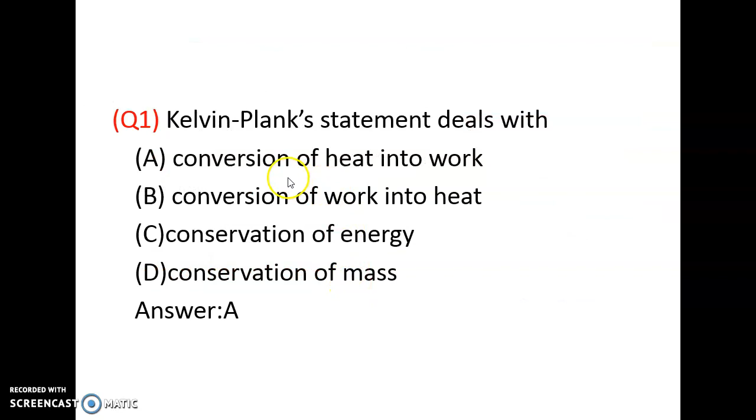The Kelvin Planck statement tells that it is impossible for any heat engine to operate in a thermodynamic cycle and deliver a net amount of energy or work done to its surroundings while receiving heat transfer from a single thermal reservoir. This is called as Kelvin Planck statement. So the Kelvin Planck statement deals with the conversion of heat into work.

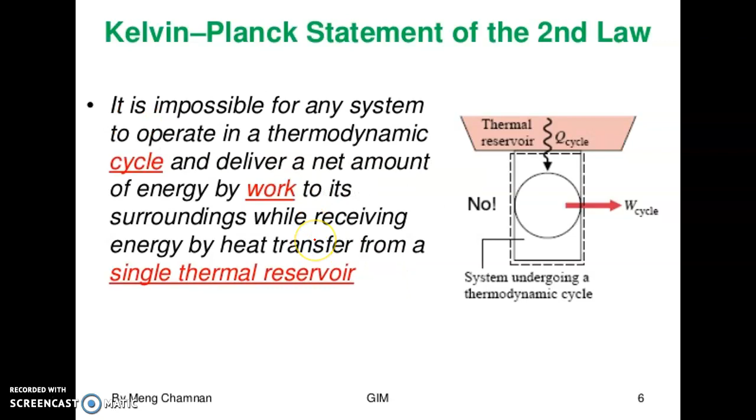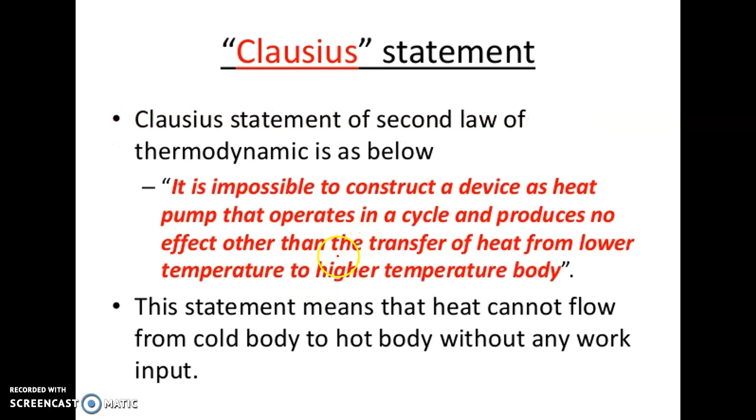The heat always flows from higher temperature to a lower temperature body, but it cannot flow from lower temperature to higher temperature body without the aid of any device. That is a Clausius statement. Heat flows from hot substance to cold substance unaided. So this statement is given by the Clausius. To transfer heat from low temperature body to higher temperature body, we need to give work.

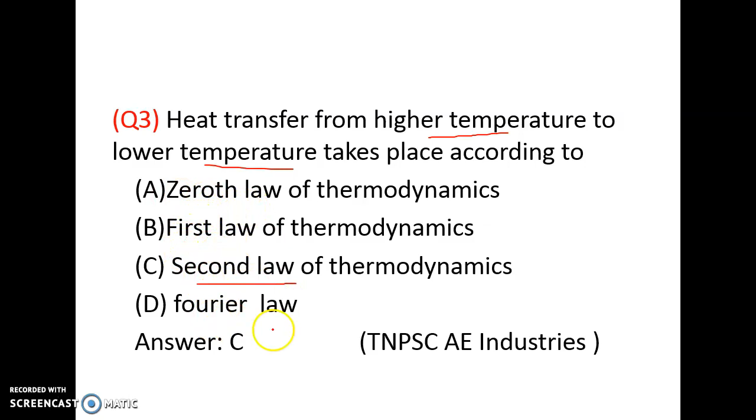Heat transfer from higher temperature to lower temperature takes place according to: zeroth law, first law, second law, Fourier law. It is according to second law of thermodynamics.

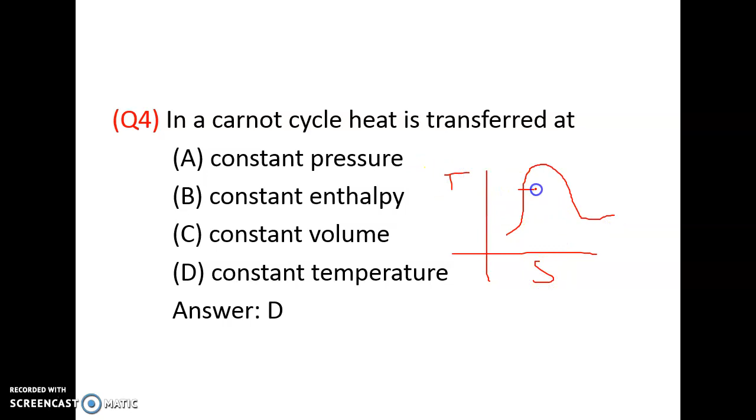In a Carnot cycle, heat is transferred at constant pressure, constant enthalpy, constant volume, constant temperature. This is the TS diagram for a Carnot cycle. It is a heat addition process, T1, T2. Heat is added at the constant temperature. Heat is delivered at the constant temperature.

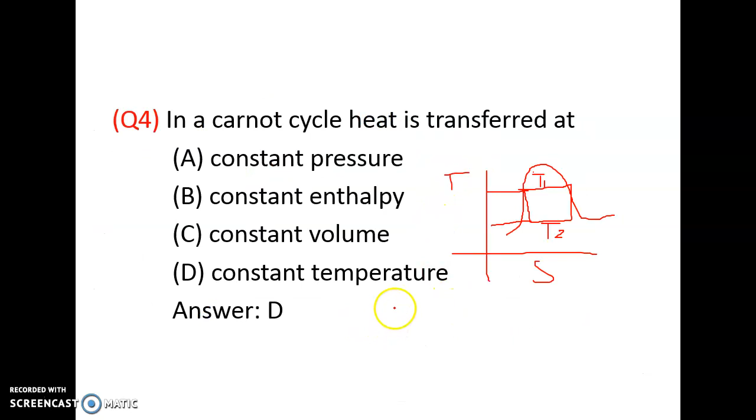So it is a constant temperature process. Heat is transferred at the constant temperature, so option is D. So this is a Carnot cycle. As an example for a Carnot cycle, you can consider a thermal power plant.

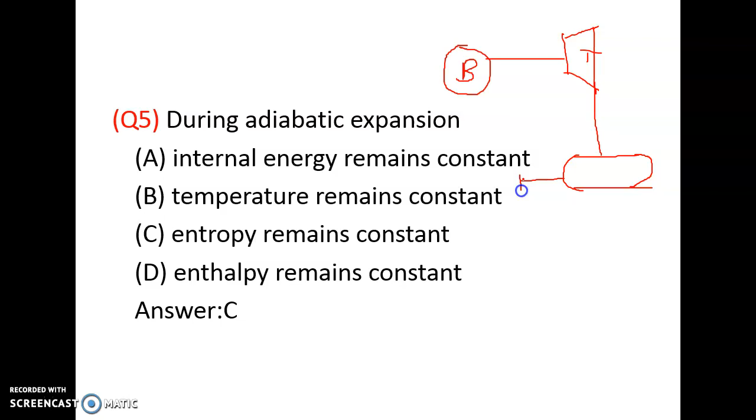In a thermal power plant, there is a boiler, and from the boiler, the steam is transferred to turbine. Then from the turbine, it is transferred to the condenser. In the turbine there is work done, in the condenser heat is transferred out, and there is a pump. Pump work is done. In the boiler, we have to give heat Q1, and in the turbine, we are getting work done, WT, and in the condenser, heat is transferred out.

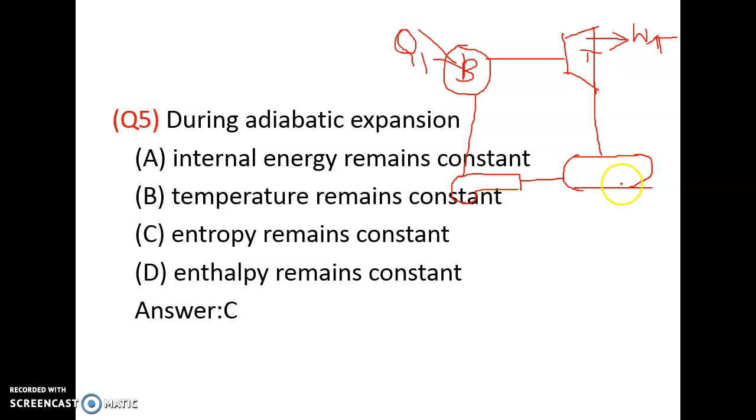Heat is transferred out, Q2, and in the pump we have to give work. So in the boiler we are giving heat, in the turbine we are getting work done, and in the condenser heat is transferred out. Here we are giving work done.

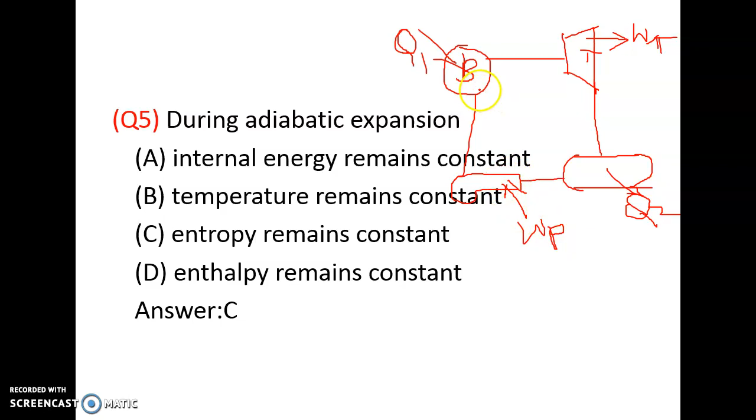So net heat transfer equals Q1 minus Q2, and Q1 minus Q2 equals WT minus WP. This is according to first law of thermodynamics.

Cyclic integral of dQ equal to cyclic integral of dW. So Q1 minus Q2 equal to WT minus WP. Then efficiency of Carnot engine equal to output by input. So output is W net, divided by Q1. Input is Q1, we are giving input Q1, so W net by Q1.

So W net equal to Q1 minus Q2. W net equal to Q net, therefore it is equal to Q1 minus Q2. So Q1 minus Q2 divided by Q1, that is equal to 1 minus Q2 by Q1. So this is the efficiency of the Carnot heat engine.

So Carnot cycle is given here. In the boiler, we are giving heat Q1, and in this turbine we are getting work done WT, and here it is a condenser, the heat is transferred out Q2, and here in the pump we are giving work done WP. The efficiency of Carnot heat engine is equal to Q1 minus Q2 by Q1, that is equal to 1 minus Q2 by Q1. So this is the efficiency of Carnot engine.

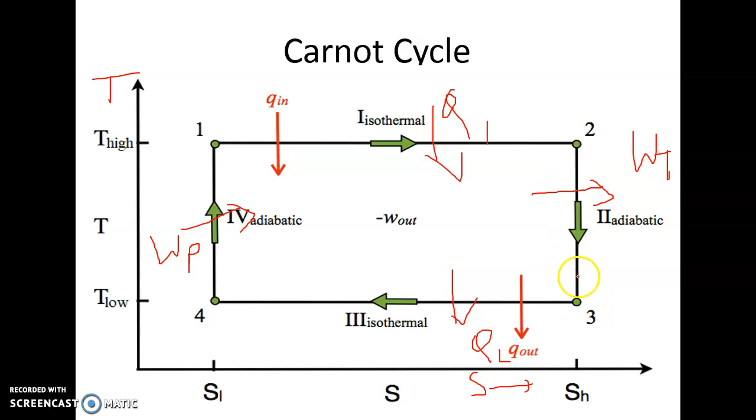During adiabatic expansion, internal energy remains constant, temperature remains constant, entropy remains constant, enthalpy remains constant. So this is a TS diagram, T is temperature and S is entropy. In the turbine we are getting adiabatic expansion. The adiabatic expansion process is an isentropic process, so entropy remains constant. During adiabatic expansion, entropy remains constant.

In Carnot heat engine, when heat is supplied by a source: the temperature of source decreases, the temperature of source remains constant, temperature of sink increases, temperature of source and sink decreases. The option is B. The temperature of source remains constant. By supplying heat Q1, the temperature of source will not change. That is, it is the temperature of the source T1.

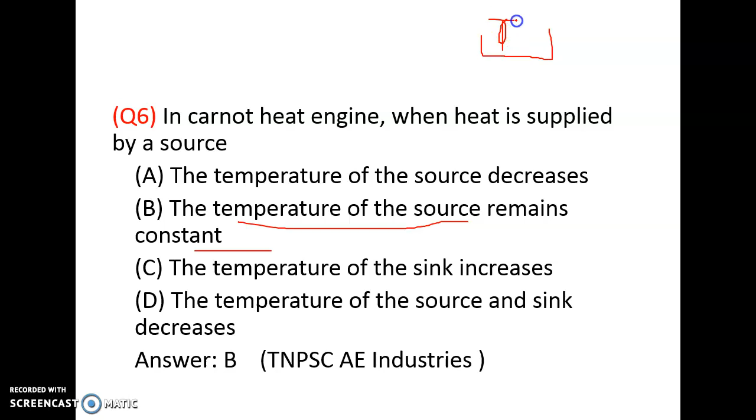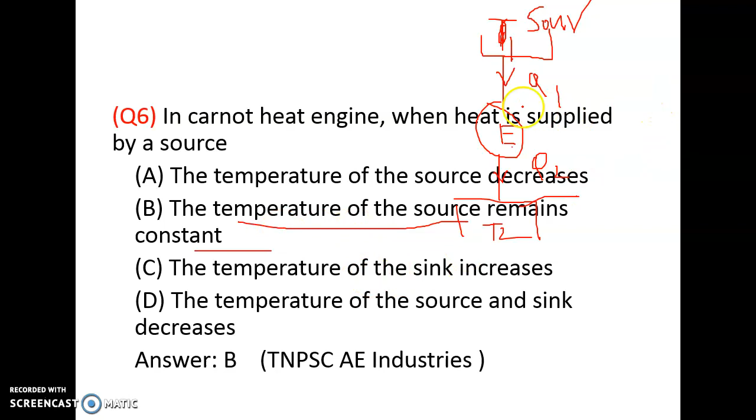So heat engine, this is a sink T2. The higher temperature T1 is called a source. This one is called a sink. This is a heat engine, and the source transfers heat Q1 to the heat engine, and the heat engine delivers heat Q2 to the sink. The temperature of source and sink does not change. The temperature of boiler does not change. So temperature of source remains constant, temperature of sink also remains constant. So option B is correct.

The cyclic heat engine does 50 kJ of work per cycle. The efficiency of the heat engine is 75%. The heat rejected per cycle is? We know that efficiency of heat engine equal to Q1 minus Q2 by Q1, that is 1 minus Q2 by Q1. So W net by Q1 is efficiency, 0.75 equal to W net by Q1. W net equal to 50 kilojoule.

We know that eta equal to W net by Q1. So 0.75 equal to 50 by Q1. Q1 equal to 50 by 0.75, which is equal to 200 by 3. 0.75 equal to 3 by 4, so 50 into 4, 200, 200 by 3.

We know that W net equal to Q1 minus Q2 equal to 50. So this is equal to 66.67 minus Q2 equal to 50. So Q2 equal to 16.67, 16 2 by 3. So option A is correct.

Question: an industrial heat pump operates between source and sink temperatures of 27 degrees Celsius and minus 13 degrees Celsius. The rates of heat addition and heat rejection are 750 watt and 1000 watt respectively. The COP of the heat pump is? The formula of COP of heat pump: this is a higher temperature source T1, this is the heat pump, and at the bottom it is a sink at a temperature T2.

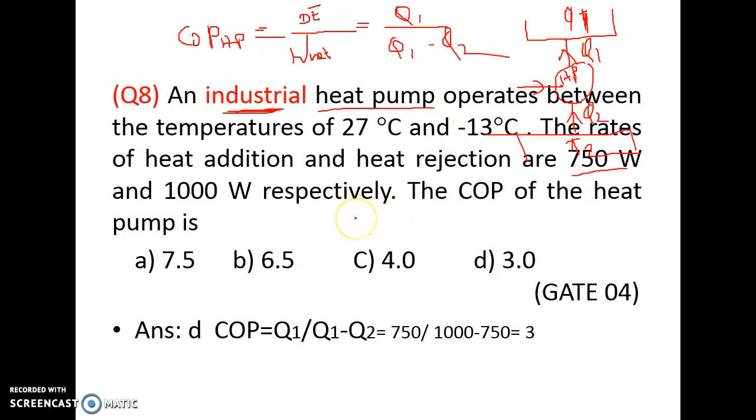Then consider a refrigerator and a heat pump working on reverse Carnot cycle within the same temperature limits. Which of the following is correct? COP of refrigerator equal to COP of heat pump. COP of refrigerator equal to COP of heat pump plus 1. COP of refrigerator equal to COP of heat pump minus 1. COP of refrigerator equal to inverse of COP of heat pump.

In the refrigerator, this is a higher temperature source T1. This is a refrigerator, and this is a sink or evaporator, refrigerating medium. Here in the refrigerator, we have to give external work. According to Clausius statement, we have to give work done to extract heat from the lower temperature to higher temperature. So lower temperature is Q2, higher temperature is Q1. Here the desired effect is Q2.

COP of refrigerator equal to Q2 by Q1 minus Q2. COP of heat pump is Q1 by Q1 minus Q2. But COP of refrigerator is Q2 by Q1 minus Q2. So the COP of refrigerator equal to COP of heat pump minus 1, which operate between the same temperature limits. So option C is correct.

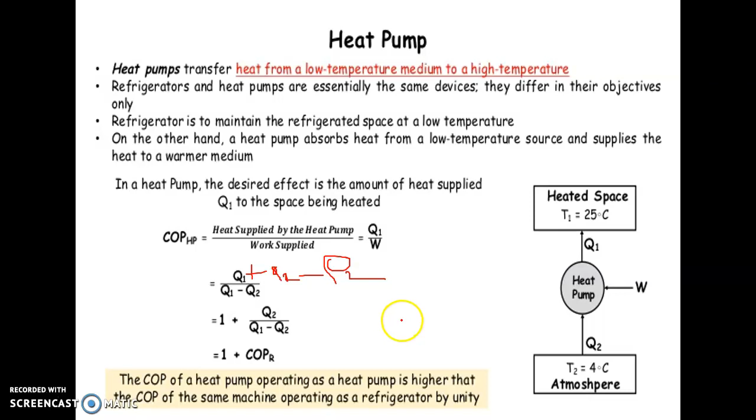So here COP of heat pump equal to Q1 by Q1 minus Q2. You can add and subtract Q2 in the numerator. It will become 1 plus Q2 by Q1 minus Q2, that is 1 plus COP of refrigerator. COP of heat pump equal to 1 plus COP of refrigerator. So COP of refrigerator equal to COP of heat pump minus 1.

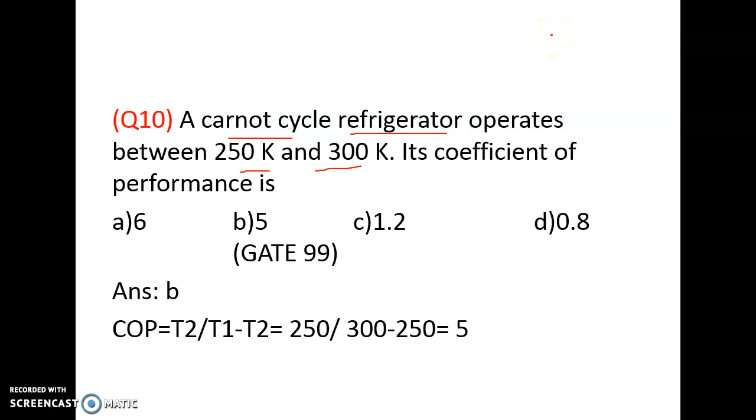Option C is correct. Then a Carnot cycle refrigerator operates between 250 Kelvin and 300 Kelvin. Its coefficient of performance is, so COP of refrigerator equal to Q2 by Q1 minus Q2. But it is a Carnot refrigerator, so it is treated